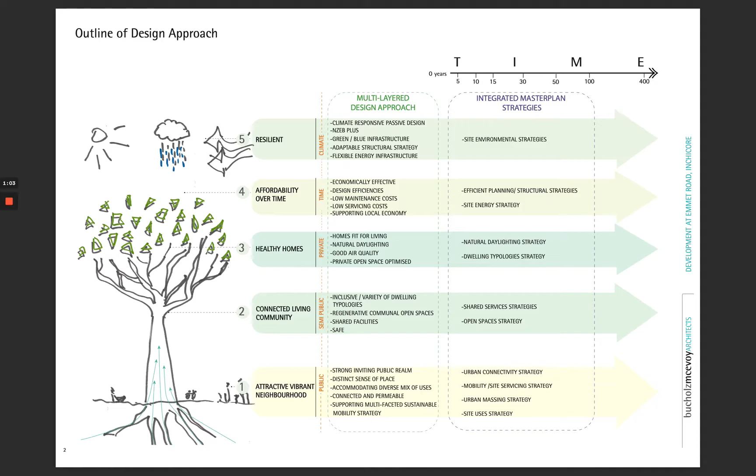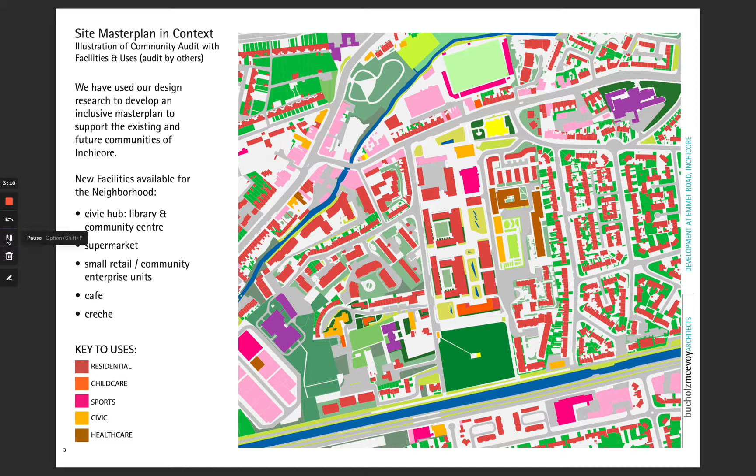Of course, this is mainly a place to live, and so the apartments and homes that are being created are represented by the red blocks that are shown on this drawing, and I'll go into the thinking around those in the subsequent slides.

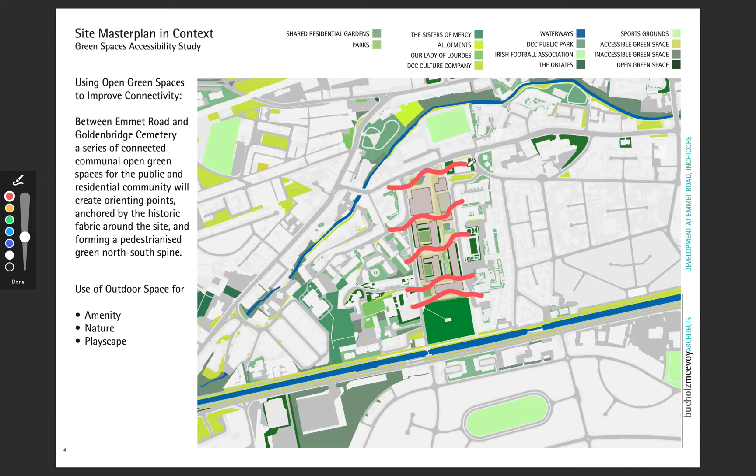Green spaces have formed a big part of our thinking for the new development. The project consists of a series of connected, open, communal spaces for public and residential community to create orienting points that are anchored by the historic fabric around the site and form a pedestrianised green north-south spine that connects all of the pieces of the site, but that also connect east-west through the new development to all of the existing wonderful spaces to the east and to the west.

The green spaces will be used by the residents and by the community for amenity, of course, but they're also natural places. They'll be part of the rainwater collection. They'll be part of the ecology. They'll be part of the playscape and playscapes that are being created within the new project.

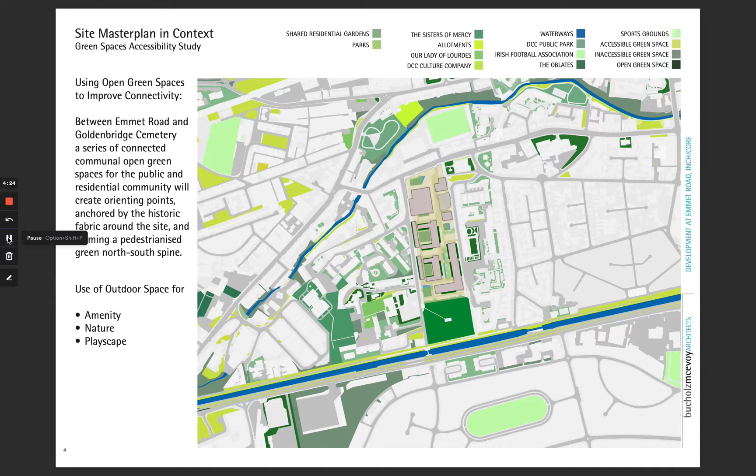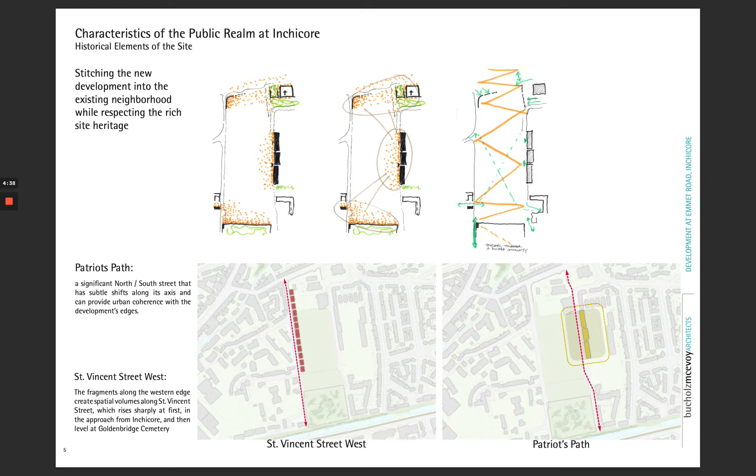Some of the characteristics of the public realm and the way that we've been thinking about developing them has to do with connecting the historical elements of the site and stitching the new development into the historical fabric. So you have Richmond Barracks, you have this little piece of wall that remains from the barracks, you have St. Michael's Church, and you have Goldenbridge Cemetery here, together as little pavilion buildings. And all of these, they have some kind of relationship to each other.

And we want to provide some sort of structure, but there's also a huge opportunity there to connect and stitch together the community using those as kind of orienting points to create these new public spaces and these new throughways that connect us across east-west from St. Michael's to Bulfin.

There's also a need to create the streets again as urban places. So St. Vincent Street West and Patriots Path are two really important existing north-south arteries.

And St. Vincent Street West at the moment, because it has no real buildings to define it as an edge, feels like quite an open place. We want to give it structure and scale by building right along the edge, relatively low, to give it human quality and character as an urban place and kind of return it as a space to the city, slow down the traffic, make it more human and more human scaled.

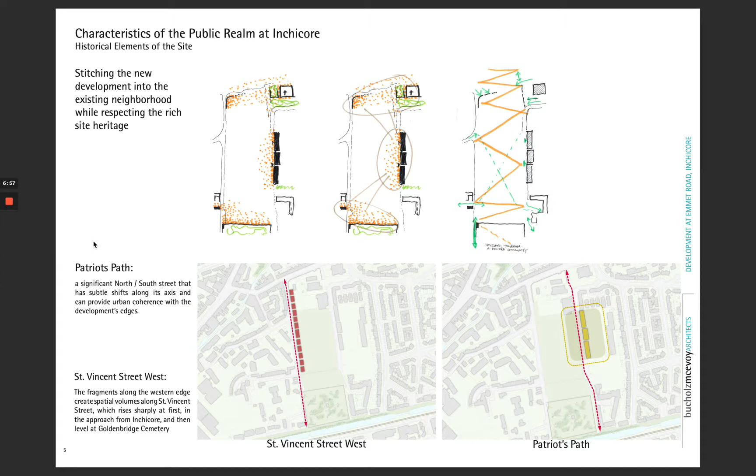These are some of the sketches and models that we've been using to kind of develop the project, and you can see here perhaps the sketch on the left-hand side, the attempt to weave together the open spaces and the spaces that will have buildings, creating semi-private areas, public areas, connecting spaces, and new public spaces. And then, trying to figure out how they relate to each other spatially and how they stitch the site together and the spaces together from side to side and create movement.

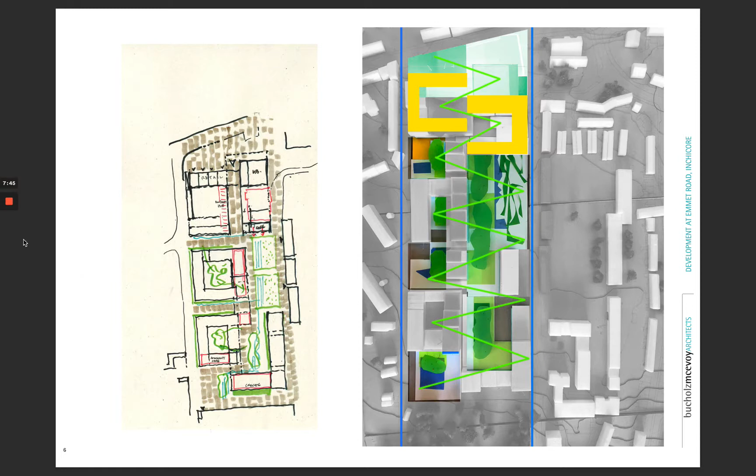We've been working quite a lot in model, and if we were able to do this in person, as it were, we'd all be standing around looking at these models. We've modeled all of Inchicore and placed the project within it, and we've used this to study the massing and the volumetry and the spaces and the rhythm of the spaces and try and really make this a part of the existing fabric so that it feels like it's always been there and always will be there, that it will remain. This is really important.

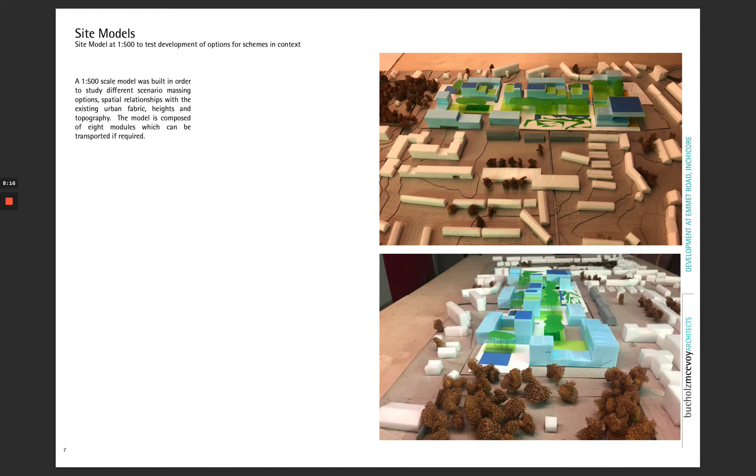Because this is a development that has quite a few residences in it and follows the Dublin City Development Plan in terms of its guidance around height and around density, we can't really make a project that's 2 or 3 stories high because we simply won't be able to fit the density that's required. At the same time, we feel that it's important not to make walls along the edges of the project. So we've decided to concentrate the height at the center of the site and provide relatively low edges along Vincent Street of 4 and 5 stories, and similarly along Patriots Path of 4, 5, and up to 6 stories.

And we also think that within this height we can bring some kind of movement to open the project up to the sun. And it's really important, when we're looking at how the sun passes around the site, you'll see this in some of our later diagrams, but obviously it moves kind of like this, that we need to make sure that we're getting really good daylight, both in terms of the individual apartments, but also in all of the open spaces that are created around the buildings. So daylight is really a driving force in terms of thinking about the massing strategy and how high things will be.

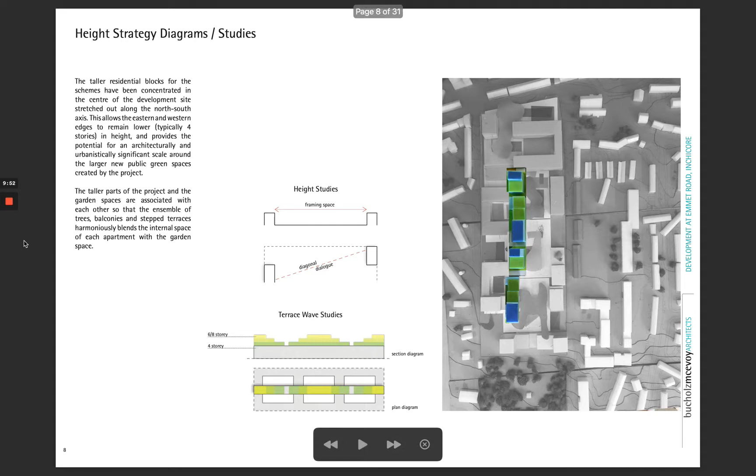At the same time, to the south of the southern part of the site, we think there's an opportunity to create, first of all, a strong visual connection to the forest of Goldenbridge Cemetery by making a kind of a gap in this large green space that runs north-south, so that you can clearly see the trees of Goldenbridge Cemetery, kind of framed by residential buildings that might rise to 6 or 7 stories along the southern perimeter.

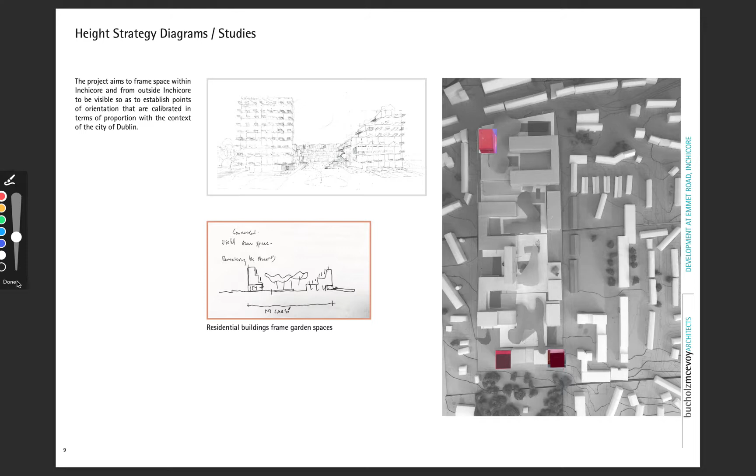We've been looking a lot at how the public realm is made in Inchicore and all of the really beautiful subtleties that meld together street with wall and some of these really nice little slippages in the urban fabric. So this, for example, in the CIE estate, where you just slip behind a wall to come into a footpath that then becomes a road. And are there opportunities to kind of do the same thing with these pieces of existing wall that we have

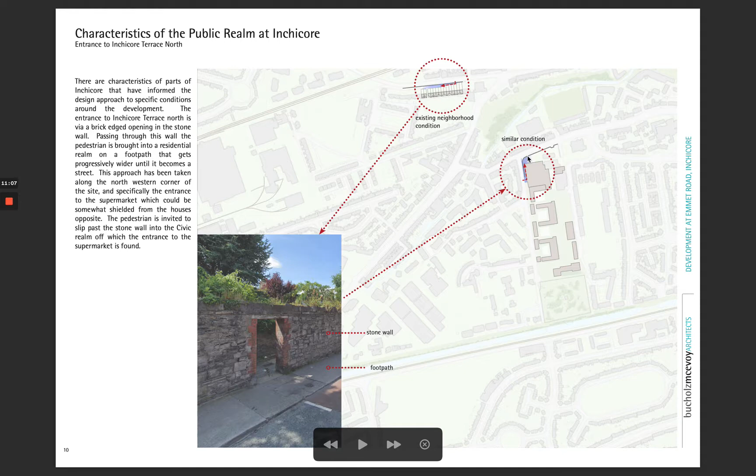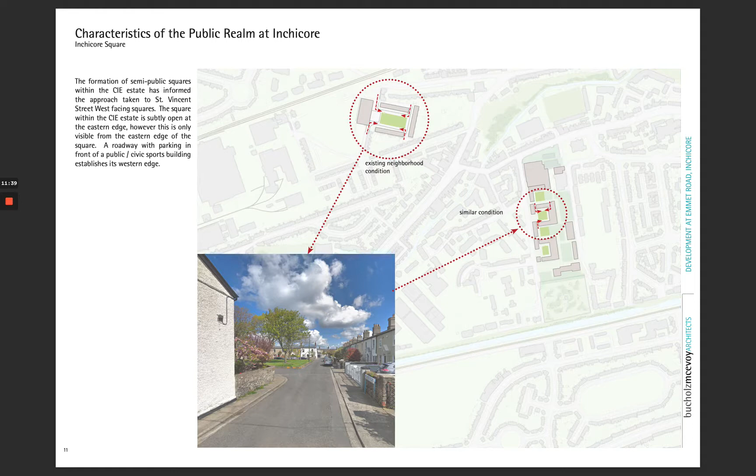in the development area? And then, trying to understand the quality and nature and proportion of the public spaces and the semi-public spaces of the public realm, the green spaces, and can we give some structure? Can we borrow some of the proportions and structures from the existing green spaces and kind of use them again? I guess our feeling was that Inchicore has such a strength of public spaces that if we could find a way to kind of amplify and increase the intensity of those spaces, this would be of great value.

So, as I said, the project has 3 major public spaces, Emmet Place, Richmond Place, and Goldenbridge Place. Now, these names are kind of our names. They're placeholder names that probably will hopefully change as you start to think about what they might be called.

Emmet Place is formed by obviously St. Michael's Church, which exists, and then the new library community center building, and then this little community enterprise retail that forms the edge of Emmet Place. Richmond Place, of course, is established by the barracks and Richmond Barracks, but also by the new facades of the apartment buildings, the residential buildings around.

And then Goldenbridge Place is formed by a little cafe along this edge, the entrance to the creche along here at Goldenbridge Cemetery and Common Ground, and then the little pavilion buildings, and of course the exit or the entrance into Our Lady of Lourdes Primary School. So they all kind of have different levels of use, or could have different levels of use, but they also relate to different kinds of cultural and heritage and educational and civic functions.

And we really think that these are things that the community, I suppose, if we're providing a toolkit or a kind of a Swiss Army knife of different kinds of functional spaces, all of these spaces have potentially slightly different uses depending on or based on where they are and what makes up their edges.

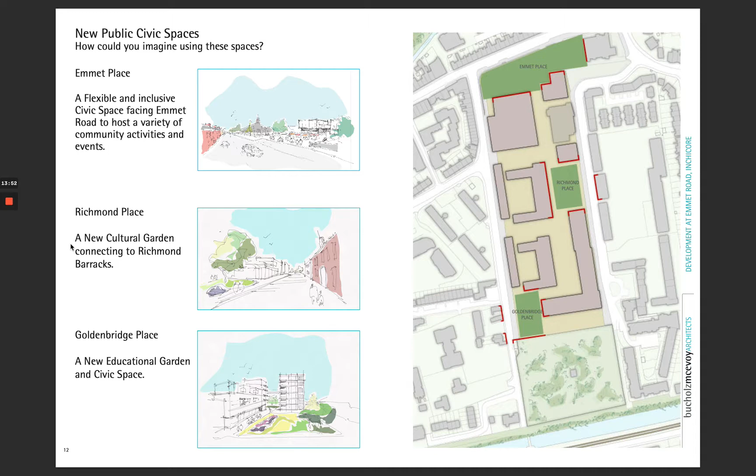The other aspect of the green spaces is how they become regenerative communal spaces. In other words, how do they serve the community that lives there? So can they become gardens? Are they places that support informal social interactions, like with benches and with seating, using the change in level across the site, which is a very nice kind of gentle sort of terracing that is part of the natural topography that we would be taking advantage of.

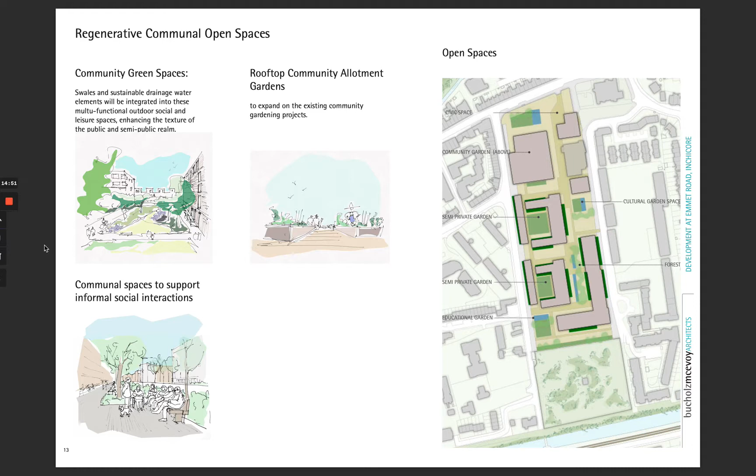How can we create semi-private garden spaces within the courtyards, for example, possibly on the rooftops of the grocery store, connected to the community center library building, and the rooftops of the residential buildings, where one could have allotment gardens, things like this. This is all part of our thinking around those spaces, so we would really welcome your ideas on those things.

These green spaces form a really strong part of one of our strong aims, which is around encouraging biodiversity and encouraging all forms of life to thrive within the new project. And this is really something that we need your thinking on and we need your ideas on because we can provide the space, but we in fact aren't going to be out there gardening. You are. So we'd like to know how that might work.

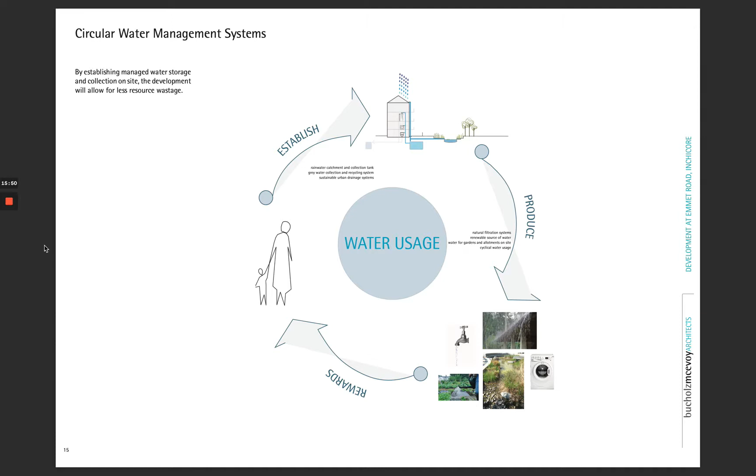And similarly, water management and how water is dealt with on the site and how it becomes part of people's day-to-day experience with public spaces is really important. How it feeds plants and animals, how it regenerates and recycles, how it's used in the gray water systems within the development. These are all things that we're thinking a lot about.

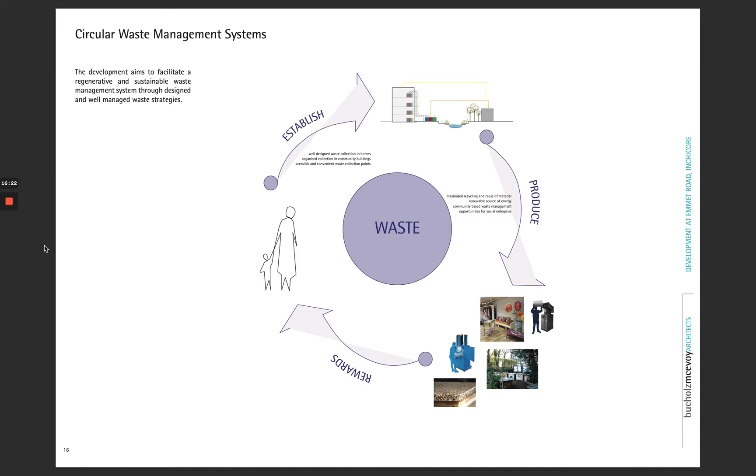And then waste, similarly, our thinking, I think like everybody's thinking these days, is really, well, you can't throw anything away because there is no such thing as away or such place as away. It's all here. So how can we establish a circular waste management system that deals with all of the different components of waste within the project? So we want to provide, and we will be providing, spaces in which these things can actually be done.

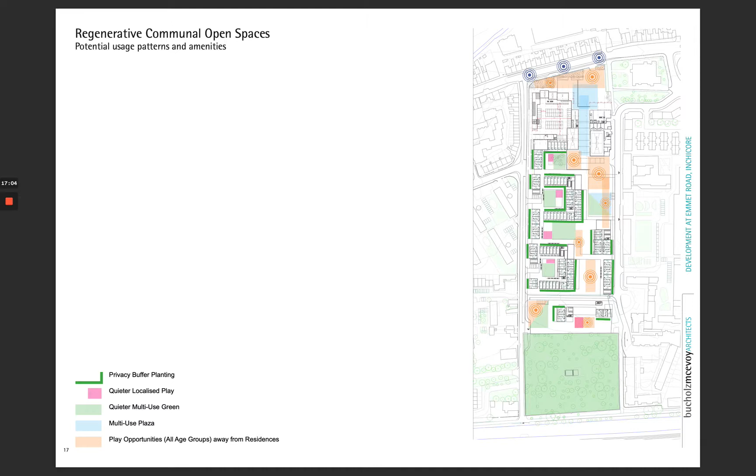Along the edges of the buildings, the apartments will be providing buffer spaces, which are attached to or belong to each apartment that opens directly onto a green space. We want to organize play spaces into places of different scale and different levels of intensity and activity. We want to create opportunities for all ages to participate in the public spaces, both next to and away from the residences.

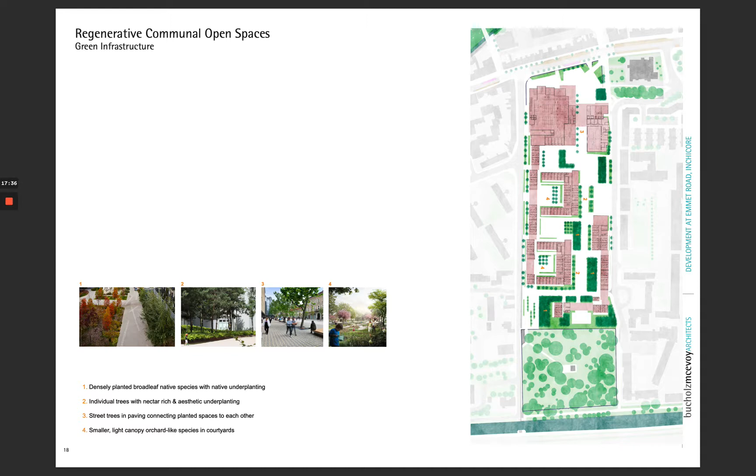We're thinking a lot about the types and species of planting that will be used. For example, extending this idea of the forest from Golden Bridge Cemetery to the Camac River Valley and Grattan Park, but also what kinds of intimacies can be created by the plant life that gives shape and form to the public spaces within the green infrastructure.

And then I spoke about water recycling. We think of this as an infrastructural component because so much water falls on the site and can be used by the development.

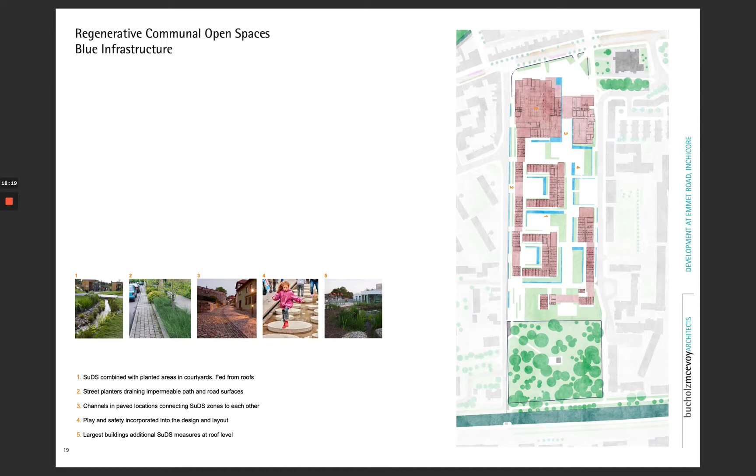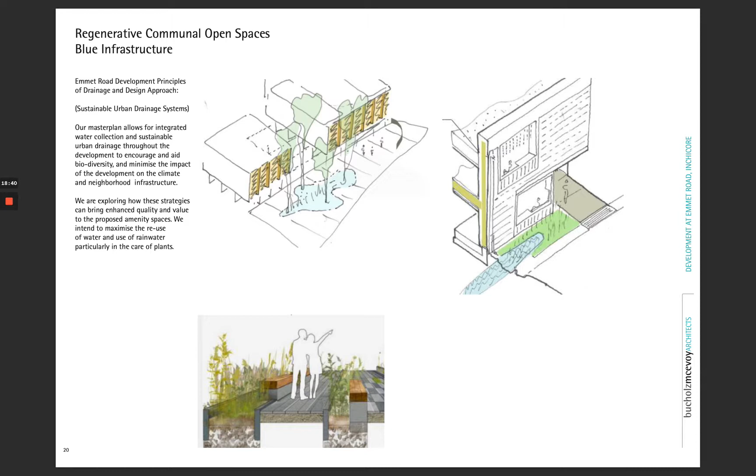This also will come into how we think about making the buildings, the facades, the roofs, the entrances, that this feeding of the green infrastructure, by the green ecology, by the blue infrastructure will be a constant kind of driving factor within how we develop the detail of how we're making and composing some of the particular elements.

We're very interested that the communal open spaces are seen as play spaces, and play spaces that are for all activities and all age groups. So obviously there will be playgrounds, which are geared at children or young children, but also there need to be spaces for teenagers, there need to be spaces for young adults and for the elderly, there need to be spaces for sport and fitness and for learning, for education, for relaxation, for recreation. All of these need to be catered for.

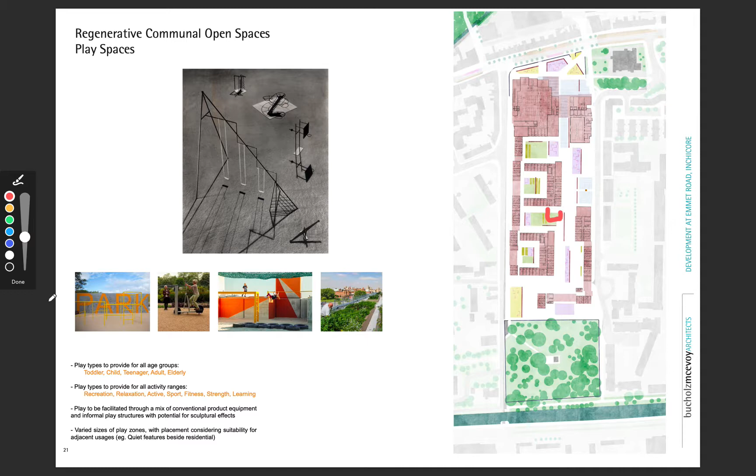So we're starting to think about the granularity of those spaces and how they might be organized in relation to, say, the public spaces that I spoke about earlier at Richmond Place, at Golden Bridge Place, and along Emmet Road, but also the semi-public spaces, and how these different levels of intimacy and use of public space, maybe with the creche, for example, or with a little indoor community room that opens to an outdoor community room, all work together.

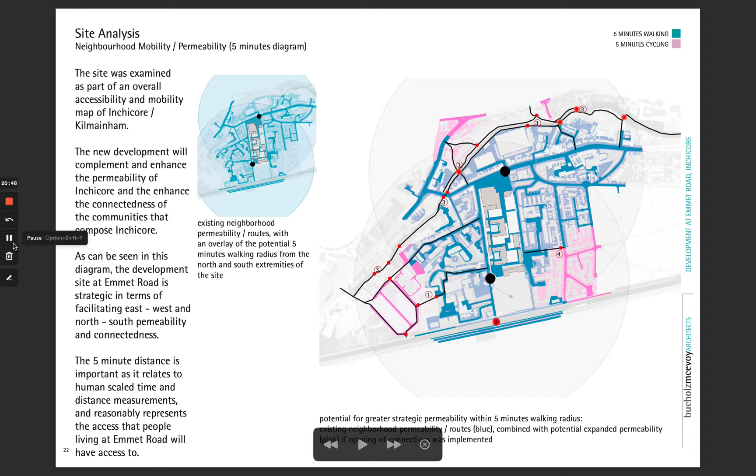We want the project to feel like it's part of the connectedness of being in Inchicore, and focusing on some of the really key points of intersection with the public transportation network, such as the Luas and the Bus Connects, but also providing a really sophisticated and enhanced level of bicycle parking, and mobility in the form of a mobility hub for the residences and a community car park for the neighborhood.

So we've looked a lot at the specific location, for example, for bicycle parking and storage. We feel that following the development plan and the new residential guidelines, a very high level of bicycle parking needs to be provided, but it's not really just about the number of spaces. It's about how they're linked to the new cycleways and greenways that are developing and exist and are being built.

It's about providing safe, secure, indoor bicycle parking, which is dry and well lit and heated, and is directly accessible to each of the apartment cores, so that using your bike is exactly like using your car. In fact, it will be even better because it will be dry, it will be well lit, it will be indoors, and it will be normal.

And I think this is really important in order to make it possible for people to choose to use things like bicycles. They need to be treated better than we treat something like a motor vehicle. So we have associated large bicycle parking rooms with each of the cores, which are dedicated for the residents, as well as a very high number of visitor parking for bicycles.

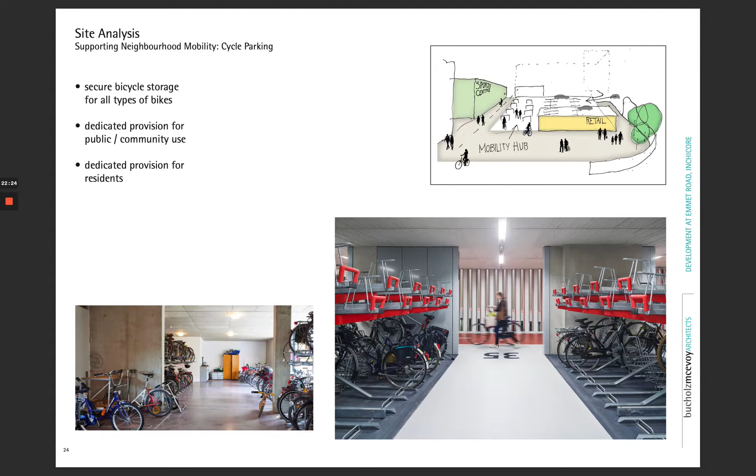And I suppose the other key aspect to mobility is around safety, and around creating a public realm in which it's safe to walk and safe to use your bike, both during the day and at night. So this is about making sure that the spaces are well lit, that people can see and recognize each other, that there aren't hidden corners,

that there aren't places where you're not sure exactly what's going on, that spaces are plain and easy to understand, that they're human scaled, that there is a high level of visibility and recognizability and coherence within the spaces, that they're well connected to each other and to the surrounding environment, that they're well connected to the street and road network.

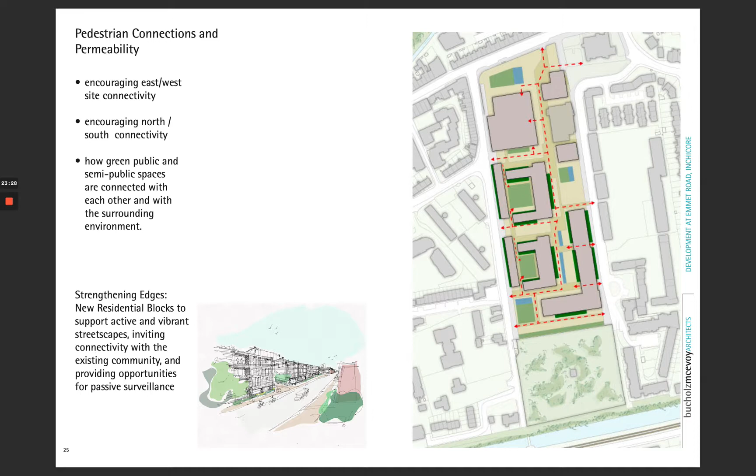These are all really important things, and reinforcing the quality and character of the road edges, and forming strong civic spaces is a key aspect to making a pedestrian and public realm which is safe and secure.

There will be car parking within the development, so a large part of the thinking around mobility is about accommodating all of the different forms of vehicular ownership and use and how that's changing.

So as we're moving away from the era of everybody owning a car or two, and towards an era of shared mobility, towards an era of new forms of motors, such as electric vehicles that need to be charged in situ or on site, at their parking stations. All of that is part of how we're thinking about mobility.

So we're concentrating the bulk of the car parking spaces into a village car park, which is underneath the shopping center, and I guess the grocery store. And it's important to say that the grocery store, because it's relatively large, has a floor plate that is a kind of a fixed dimension. Under the development plan, the number of parking spaces that's permitted with the grocery store in this location is relatively limited at about 20. So we can fit a few more than that underneath the grocery store in the undercroft.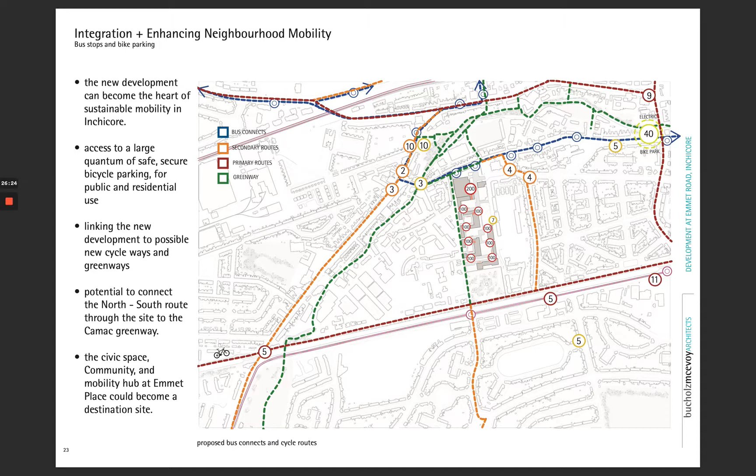So the whole idea about mobility is to try and share it across all of the different forms that exist, to connect the development into the existing public transportation networks and cycleways that have been created and are being created, and give people the maximum amount of choice and the maximum benefit from the way that they can move around from their homes to their places of work and their places of education and their places of leisure and so on.

So this is a high-level axonometric diagram that gives a kind of idea of the heights. I had said earlier that we had concentrated the taller parts of the scheme down the center of the site, and this is really so that you see, as I draw the sun path across the scheme, that we get maximum daylight into both the residences and into the public spaces around the residences, all of the green spaces around the residences. So along Vincent Street West, it remains relatively low at mainly 4 stories, a few bits at 5,

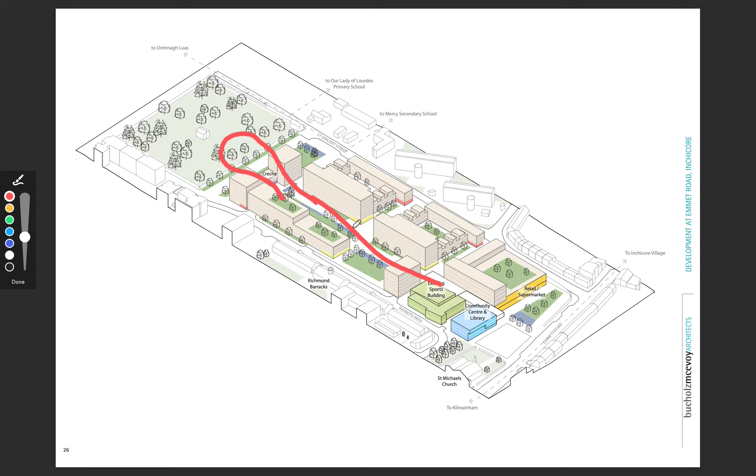and then along Patriots Path, there's some lower pieces stepping up to 4 to 6, 7 stories with these taller buildings kind of overlooking the cemetery, with this large opening between them that connects this view to this north-south green space to Golden Bridge Cemetery.

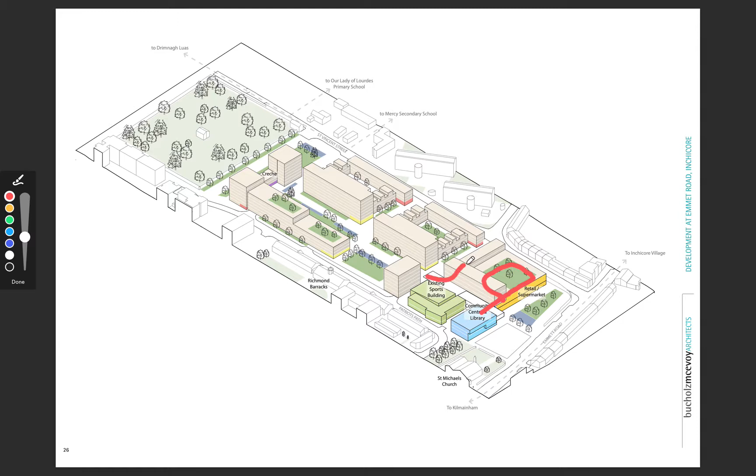And then you can see the community center library building here at the north, the existing sports community building, the community and enterprise and retail space, and then behind that the grocery store on the first floor. And you see it then on top here, the garden, which will be connected to the community center library building and also to Richmond Place via a connection at the corner here.

So the heights in the scheme will vary from between 4 and possibly up as high as 10 floors. These are things that are still very much under consideration, so we'd really welcome your views on those things.

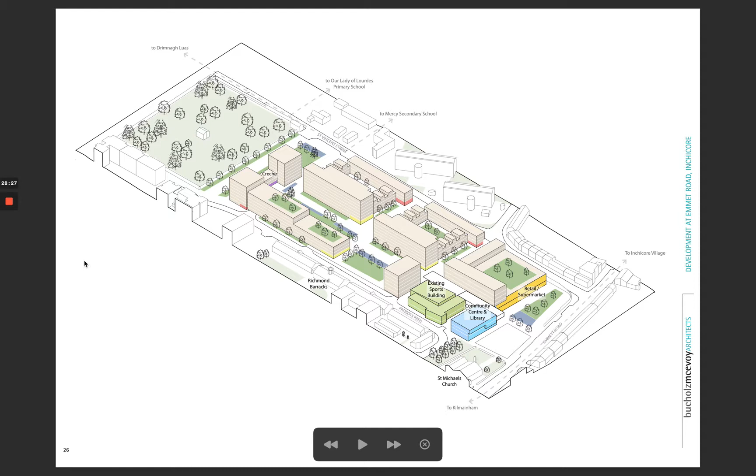In terms of the potential synergies between the community center library building and the existing sports community building, Golden Bridge Cemetery, Richmond Barracks, sorry, we've been really thinking about how all of those could kind of work as a campus together. And what are the synergies of all of these spaces when brought together? We have the sports community building, which has a sports hall, Richmond Barracks, which has an exhibition and venue hall, plus a series of smaller spaces that are used as a library at the moment and a cafe.

How can we complement those spaces with the community center library building, and how can we think of the things that maybe aren't provided by those spaces and the things that are provided by those spaces so we don't sort of double up? So we've been thinking about the community venue as a space that should have a dimension that can accommodate different kinds of things, but in particular music and drama and performance should be able to be accommodated there. So it can't really be the size of a basketball court.

Plus, you've got a basketball court in the community center sports building, so you don't really need another basketball court. But it could be half the size of a basketball court, so it could be used as a half basketball court. In other words, the community venue could still have a sports function, but its driving forces would be more towards community events, towards music, towards performance, towards possibly other things like markets, events that are sponsored by the community.

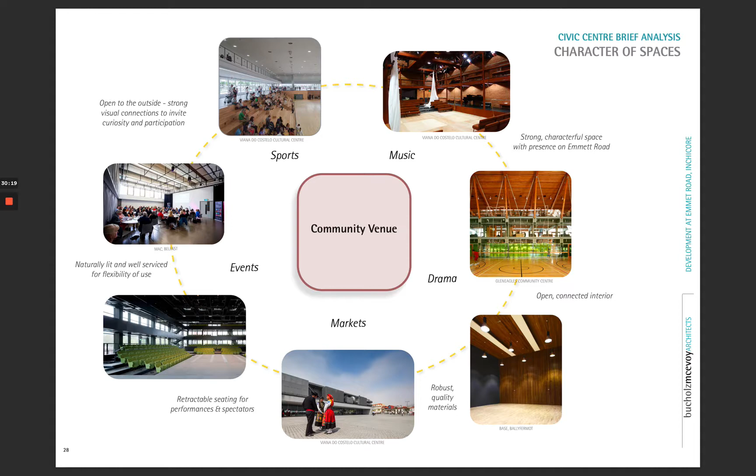So this really gets us into thinking about the dimension of that space. You know, how big should it be? What kind of a height should it have? What span should it have? So we've been looking carefully at that.

At the same time, a community venue needs to be connected to the rest of the development and in Inchicore, and we're kind of thinking of this as, I guess, a living room or a space that is kind of like the front door, which has a cafe, but also can exhibit things, can handle some small events. It's welcoming, it's friendly, and we've been looking a lot at the existing community center in Inchicore, because what's quite interesting about it, of course, is that you enter in and you're in a kind of a dining room, living room with a kitchen off it, and this feels to us very comfortable.

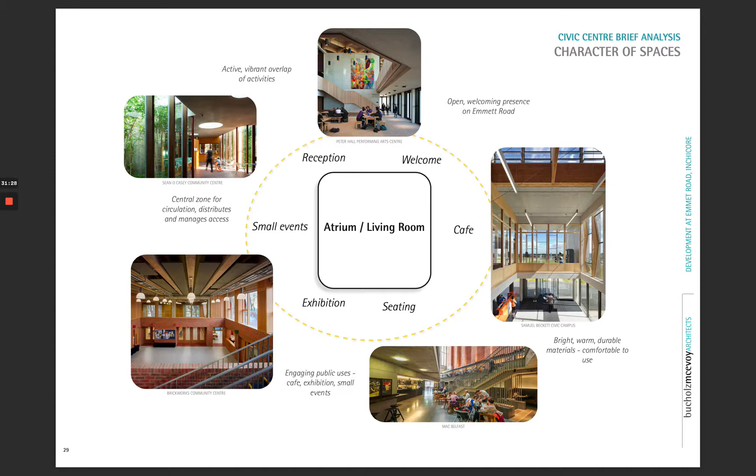So this is kind of an idea that we think is worth picking up on, and we've been looking then at other community center buildings such as the really great Sean O'Casey Community Center by O'Donnell and Tuomey, or the wonderful Brickworks in London, the MAC in Belfast. So there's some great examples, Samuel Beckett Civic Campus that we worked on, that really show what could happen in these spaces. Those are kind of ground floor spaces.

So above in the community center and the upper floors, what else should happen? So we need to have multi-use rooms where you can do dance and yoga and aerobics, and you can have functions and cooking demonstrations and ukulele lessons and so on. But where small groups, as low as 2 people or as high as 30 or 40 people, can meet comfortably.

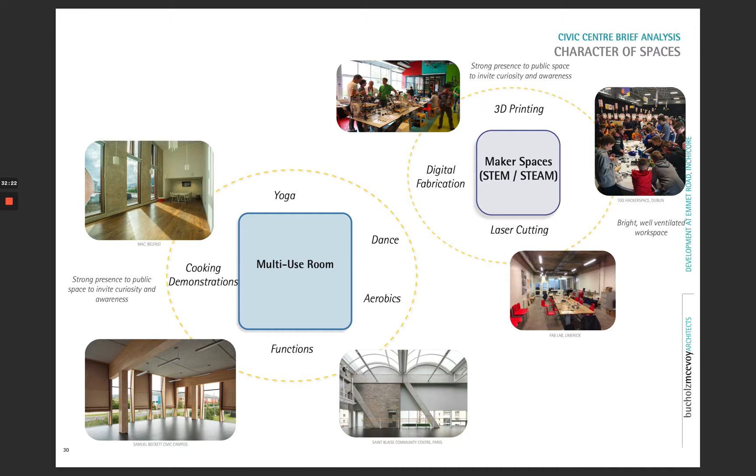And then where can we have maker spaces, spaces where you have machines and equipment that might have special environmental requirements, 3D printers, laser cutters, that kind of thing. And how accessible should that be to the youth of the area in particular? And how can they be used to leverage the creativity and interest that young people have in technology?

So in terms of the other design layers, such as resiliency and quality and value over time, what we've really been putting a lot of thought into is what we're going to build these things out of. We know that, in 2021, we cannot continue to build out of the kind of materials that we've been building out of for the last 40 years. We can't afford it environmentally. It's not really possible.

So we're really thinking about how we can build this out of wood, how we can build it using design for manufacture techniques, how we can build it using prefabricated modular construction, but in a way which is really leveraging the technology to ensure that the entire place is built with care and with a high level of precision, and with very low tolerance joints, optimizing prefabrication, and the more you design before you get to the site, the better the site goes. And this has always been our experience.

And with such new materials as prefabricated timber and mass timber construction, this is possible at a speed and at a scale, but also with an environmental lightness and responsiveness to the demand that we live under to reduce carbon, particularly embodied carbon, in our construction techniques.

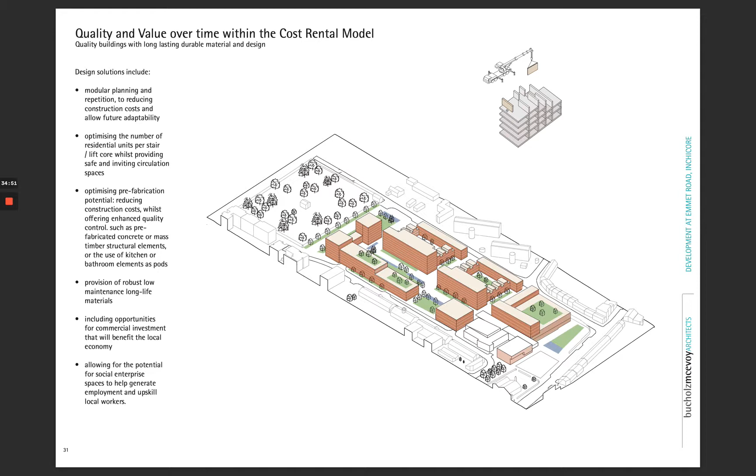So to make sure that all of the apartments have good daylight, that they're heated by the sun, that they have good ventilation, that the inside and the outside can be brought together through the daily cycle of people's lives, and people can choose to open and close their terraces and their gardens and their living spaces to and within each other. So this is how we're thinking about quality and value over time. So that's the end of the presentation.